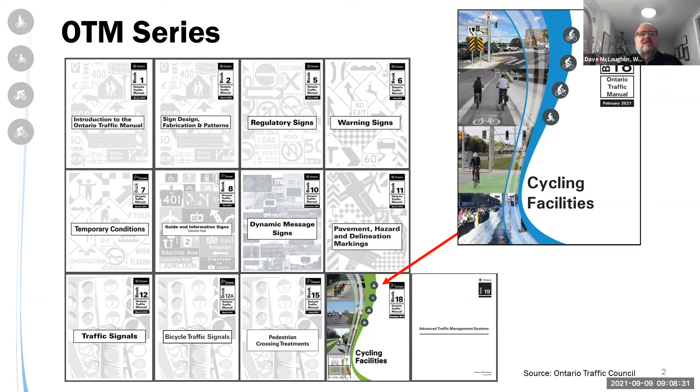So in terms of what's in it, the structure or sections are to the left. As you can see, we have a general information section. We talk about design users, we talk about the network planning process. We introduce and talk about bicycle facility design and facility selection, with some changes in terms of thresholds for facility types that we'll get into shortly. There's a greater focus on design solutions at intersections and crossings. We've added some additional components to other facility design treatments, including at transit stops. There's a section on implementation, which is sometimes the challenge, to provide guidance to municipalities on a process for implementation, support features as well, and maintenance strategies, which is a really important component. As you all know, the minimum maintenance standards for Ontario were updated a number of years ago to now include bike facilities, so that's an important consideration. Then there's a glossary, an appendix on signage, and a section on pavement markings.

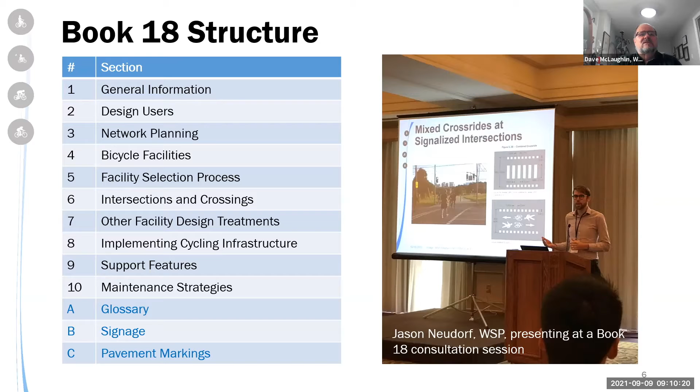So the evolution of OTM Book 18 is very similar to what you've all experienced. Early on, we were mostly focused on getting bike facilities, primarily bike lanes and multi-use pathways. That significantly moved to more dedicated and physically separated bike facilities, buffered bike lanes, protected intersections. So the new OTM Book 18 really builds upon that trend and incorporates new design guidelines to give municipalities the tools to assist them in making decisions and implementing these types of facilities.

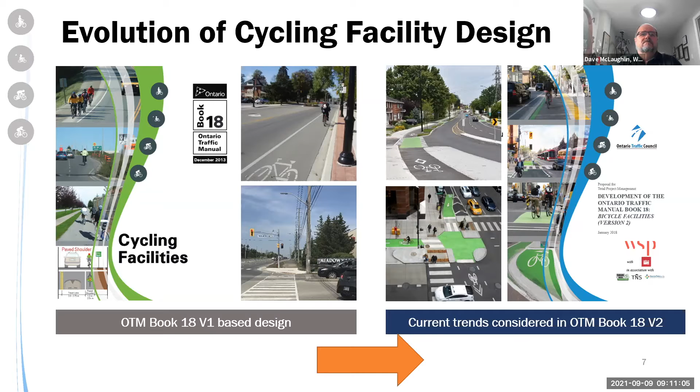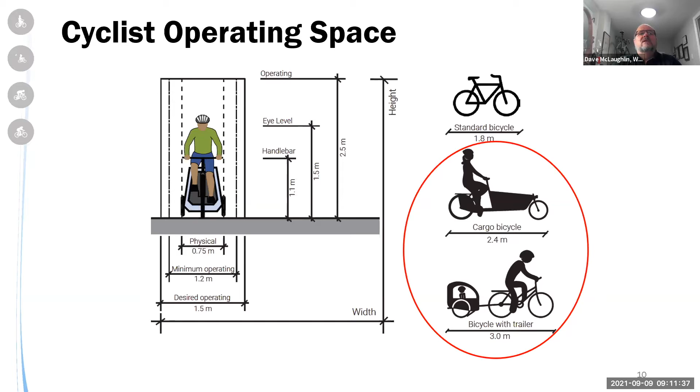So the general information section, if you can move on, really talks about design users. It talks about various details about cycling that need to be considered. Design users is all about all ages and abilities. Next. So we talk about the actual cyclist operating space. I don't think this is really that different from the original one, even though we're taking into account cargo bikes and bicycles with trailers in a little bit more focused way in these guidelines.

The design cyclist has changed a little bit. It's always a challenge when we design cycling infrastructure at a municipal level. You really want it to be ideally appealing to the majority of the population. But the reality is, people are not super comfortable with bike lanes on multi-lane roads, and you're lucky if you get out to 5 to 9% of the population. We really, in this guide, are reaching for the interested but concerned, which is basically 50 to 60% of the population who we want to encourage to cycle more.

We want to provide better facilities for them, better separation, or at least buffered facilities, and ideally much better information, guidance, and markings at intersections to guide them, and also to allow all road users to understand who will likely be where along the road system, both traveling and crossing at intersections and driveways. Next.

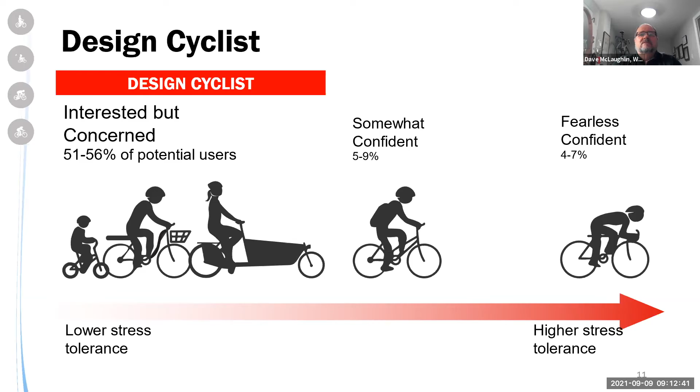So network planning, if you can go to the next slide, is really an exercise about thinking about route selection and facilities. There's a process in the OTM Book 18 to provide some guidance. We integrate complete streets for the first time in this manual. The principle that when municipalities plan to rehab or redesign their streets, that's a time to think about all users, both pedestrians, cyclists, transit, cars, and also the infrastructure below.

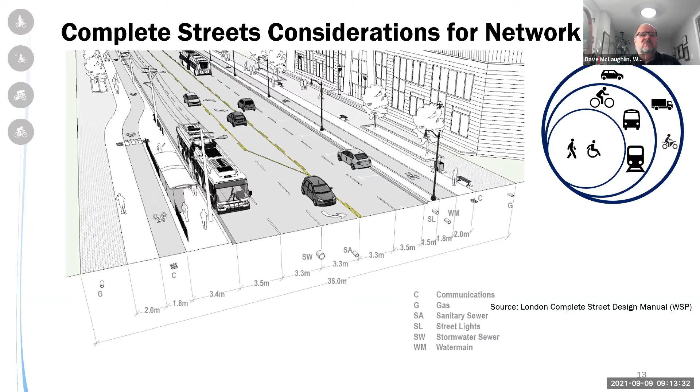So it's important to provide that integration with pedestrians and cyclists first, with transit, and then commercial vehicles after that. So that's the little icon on the top right, trying to impress upon everyone that when we design these streets, we need to design them for people first, and especially for the most vulnerable road users. Next.

So network development in OTM Book 18 provides a process that gives some guidance to municipal staff on information and inputs to help make decisions on what routes should be. It's true that we want all roads ideally to be better and improved for cycling infrastructure, and there is guidance in the book that speaks to that. When roads are improved or resurfaced, opportunities should be given to see what can be done to improve those. But on those components of a network that's been designated and approved by council, there's a process to find the best route.

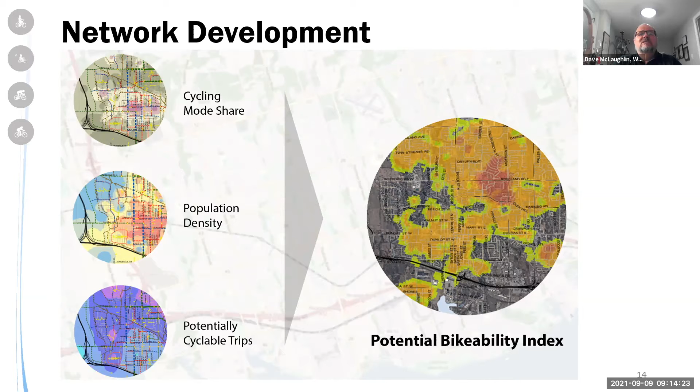So looking at cycling mode share, looking at population density, looking at areas where we think we can get more cycling trips, looking at equity, proximity to schools, and all these types of things come into place when we're doing this type of analysis in GIS. Next.

So an integrated cycling network really comes together as a number of layers. And as planners and designers and engineers, we think this way when we develop these plans. We don't just think about routes and facility types. We also think about implementation. We also think about users.

So if you look at the graphic on the left, and it may not be necessarily in the same order for you, but we talk about a recreational cycling network, which would be mostly off-road for people, a local cycling network, which would be on local roads where we don't really have designated facilities.

The speed might be posted at 40 or 30 kilometers an hour, and there's very little traffic. Then we talk about the more commuter spine networks on your collector and arterial roads that really require designated and ideally buffered or physically separated cycling infrastructure. We integrate that with road, transit and pedestrian networks so that they are all connected, which is really important.

And in the design of cycling infrastructure, we also want to be careful that we take into account how pedestrians are accommodated and how cyclists and pedestrians sort of interface at intersections, because we're, as you all know, improving our pedestrian systems to make them more accessible. We want to make sure that as we build the cycling infrastructure we don't conflict with that or add additional confusion to both pedestrians and cyclists on how they should interface at intersections and crossings.

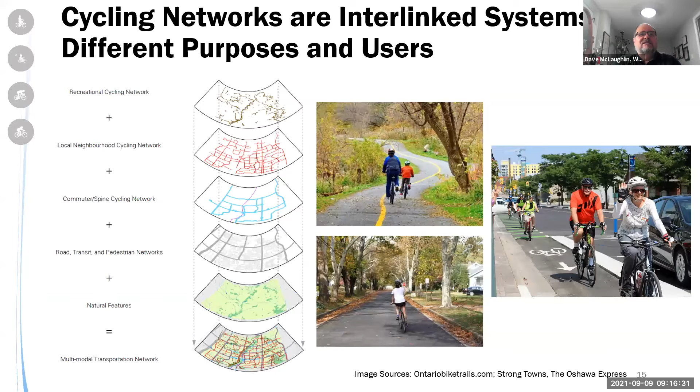I am now going to pass the baton over to my esteemed colleague, Shawn Smith, who's going to take you through some of the design changes and highlights in the new OTM Book 18. So Shawn, over to you.

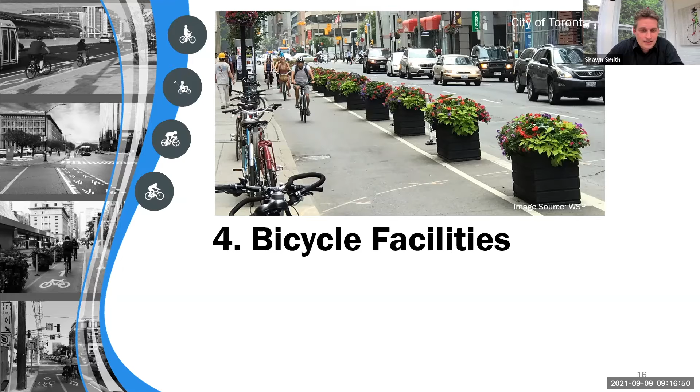Thanks, Dave. Yeah, so section 4 focuses exclusively on linear cycling facility design, and there's an increased level of guidance from the original Book 18. Here are all of the facility types that are covered, and they're separated into 3 different categories. On the left column is the physically separated bikeways, which includes physically separated cycle lanes, cycle tracks, and in-boulevard multi-use paths. And then the middle column are the bicycle lanes on street, which include the conventional, buffered, and contraflow, on one-way streets. And then the right column is the shared cycling facility type, which covers advisory bike lanes, a new type which I'll discuss in a few minutes, neighborhood bikeways, mixed traffic operation on quiet streets, and paved shoulders.

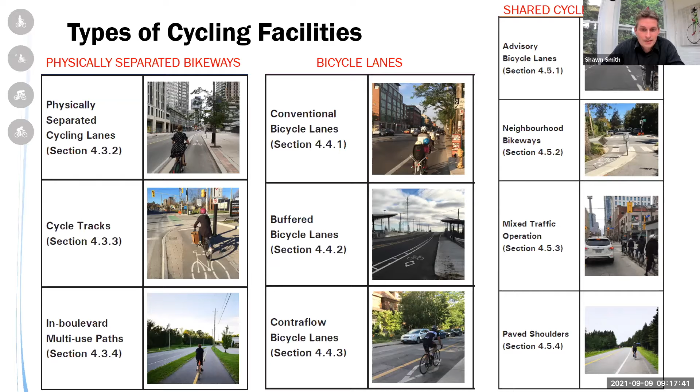So the new Book 18 also contains detailed guidance on different considerations and applications of separation techniques, such as curbs, planters, bollards. And you can see here that they vary in degree of protection, aesthetic value, and costs and other factors that need to be considered.

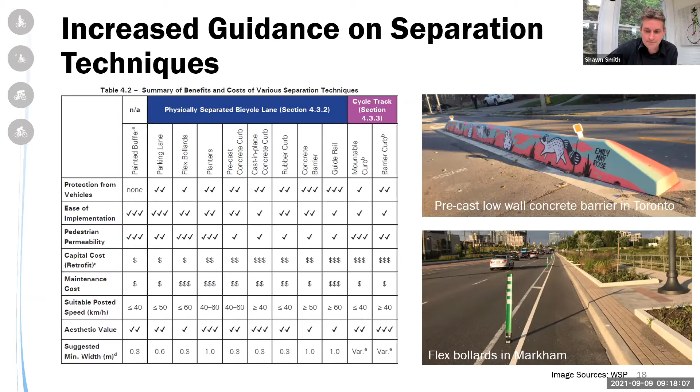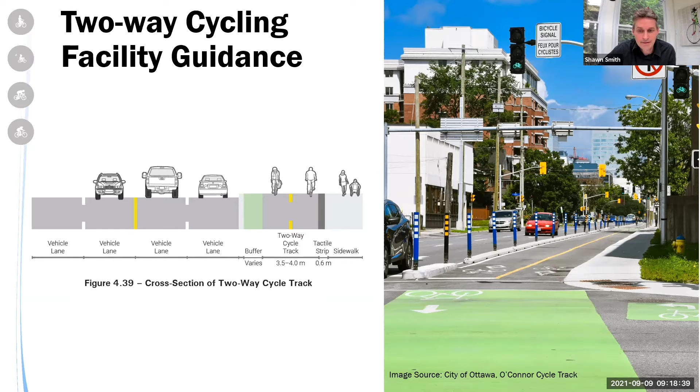There's also increased guidance on two-way cycling facilities for multi-use paths and cycle tracks. Key challenges for two-way facilities are that they are sometimes less intuitive, often have complex intersection designs, and can sometimes be difficult to accommodate cyclist queuing. But benefits, on the other hand, are reduced space requirements overall, ease of maintenance, because there's one facility instead of 2, and also a high degree of comfort.

As I mentioned, advisory bike lanes are a new facility type used when a roadway is too narrow to accommodate both two-way traffic and traditional bike lanes at the same time. The typical application context is 30 to 50 kilometers per hour and less than 4,000 vehicles per day. Motorists move into the bike lane to avoid oncoming traffic, yielding to cyclists. And they can often be implemented in the same space as 2 shared lanes, but offer a traffic calming benefit as well as significant improvement in cyclist comfort when you compare it to, say, putting sharrows on the road.

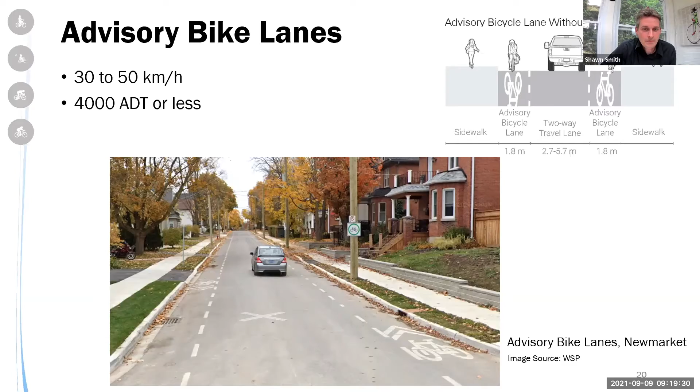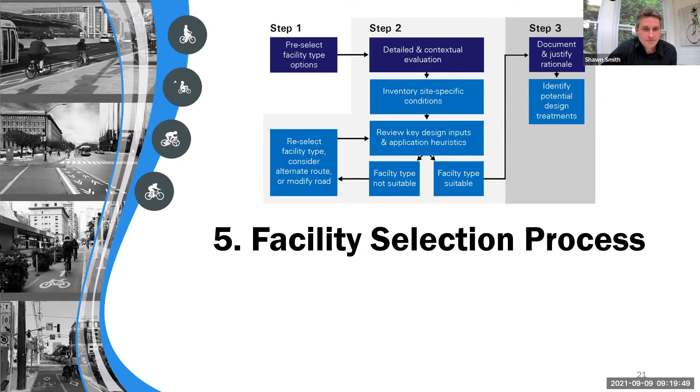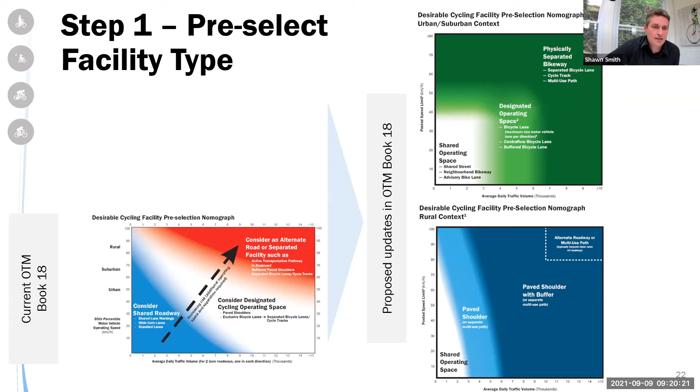Okay, on to section 5, which is all about the facility selection process. And Book 18 still has the 3-step process. However, we've updated the tools that recommend physical separation at lower motor vehicle speed and volume thresholds. So some of you may be familiar with the facility selection nomograph from the original Book 18, which is shown on the left. And on the right is the updated version, and we've split it into urban suburban on the top and the rural context on the bottom. And then following step 1, step 2 refines and confirms the facility type using the context and engineering judgment. And then step 3 of the process documents the design decision and rationale.

So I'll delve into the nomographs a little bit further. So here is the urban suburban one. And the white space in the bottom left is the shared operating space. We've got traffic volume across the bottom axis, and then the posted speed limit on the left axis. So we're recommending 40 kilometers per hour maximum for shared streets in mixed traffic.

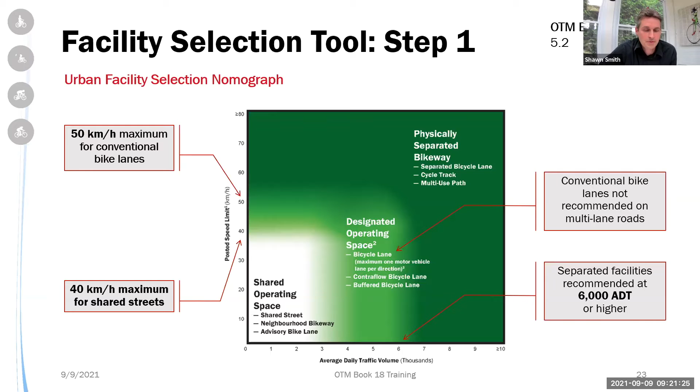And then you move into the light green space, which is the designated operating space, where we're recommending a maximum 50 kilometers per hour and up to 6,000 vehicles per day. And a big change, as Dave mentioned, is that conventional bike lanes are no longer recommended on multi-lane roads. So the minimum for, say, a 4-lane road would be a buffered bike lane, but preferably even going to a cycle track, depending on the context.

And here is the rural nomograph. So again, starting in the bottom left with the shared operating space. It's still appropriate, but on very low volume roadways and the lower speed limits. And then moving up to paved shoulders, when you get to about 1,500 to 2,000 vehicles per day and above 60 kilometers per hour as a minimum. And then at greater thresholds, 6,000 vehicles per day, recommending a buffer with the paved shoulder or a separate multi-use path beyond the clear zone of the roadway.

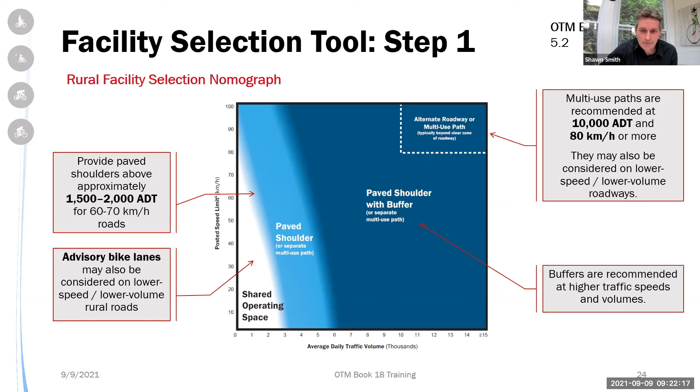So in step 2, we're refining the facility selection type. There's some new tools like these charts here, which take into account some of the traffic considerations or operating characteristics of the roadway and help you narrow down further based on the various factors. For example, the function of the roadway, the vehicle mix, pedestrian activity, frequency of intersections and crossings, on-street parking, and so on.

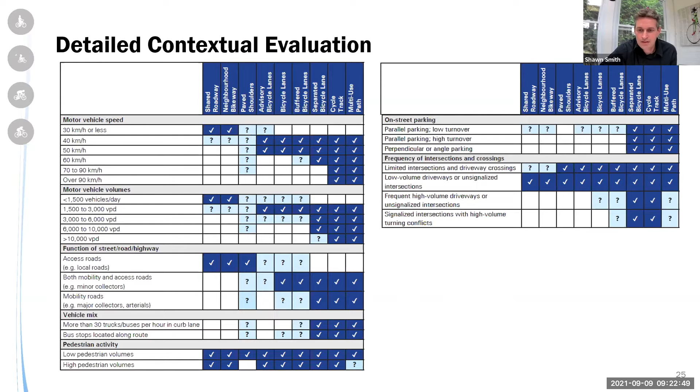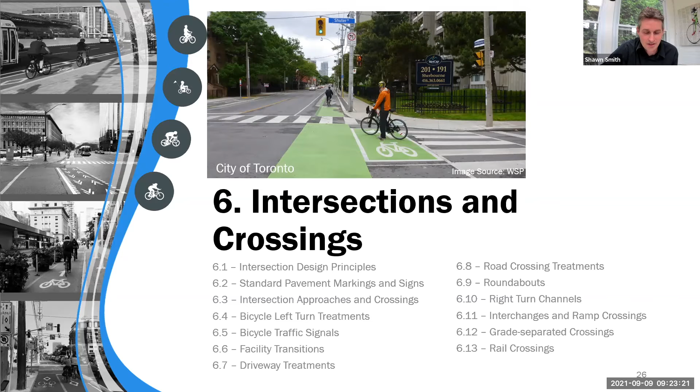Okay, so on to section 6, which is the biggest chapter in the new guide. It makes up about a third of the overall guide and covers things like adjacent and setback crossings, including protected intersections, driveway treatments, right turn channels. And there's also expanded guidance on mid-block crossings, roundabouts, grade separation, and so on. So there's lots of material. I'll just touch on some of the highlights today.

And some key features of the protected intersection are that setback crossing, as I mentioned, for the cyclist, 4 to 6 meters from the parallel street. And the corner refuge island, and an appropriate sized radius for that island that helps slow turning vehicles. And the forward bicycle queuing, so you could see that they get a head start from the motor vehicles when they get a green signal.

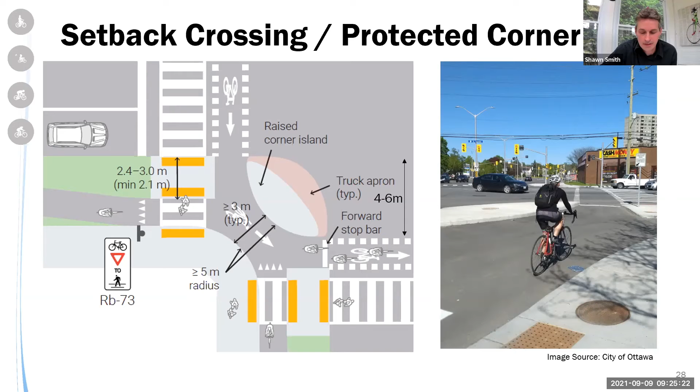And here's an example of an adjacent crossing, which typically requires less space than setback crossings. That's one of the advantages. It's adjacent to the motor vehicle lane. In this case, the figure, it drops down to road level, and the physical separation is maintained to the stop line. And there is a forward stop bar to improve visibility. Another consideration could be using signal phasing strategies like a leading bicycle interval, which would give the cyclist a head start green before the motorist.

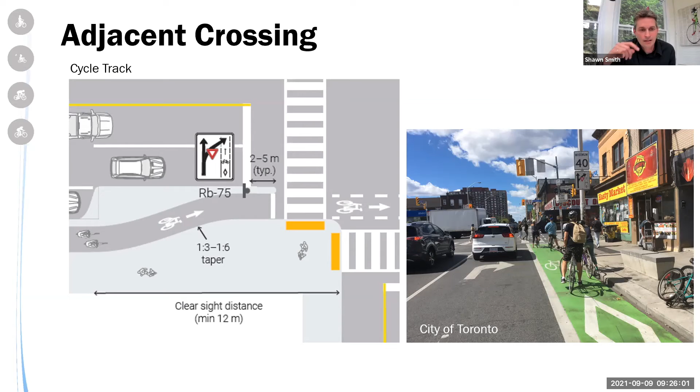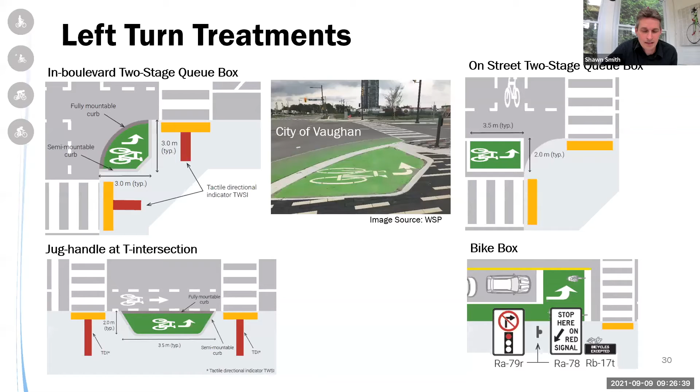Okay, well, in addition to the protected corners, here are 4 design solutions for cyclists to make a left turn. So we've got the 2-stage queue boxes, both in boulevard, which is the top left example and the one in the photo, and the on-street 2-stage queue box in the top right. And then there's also a jug handle or pocket design used at T intersections, and the bike box, where cyclists can go ahead of the motor vehicle lane at a red signal.

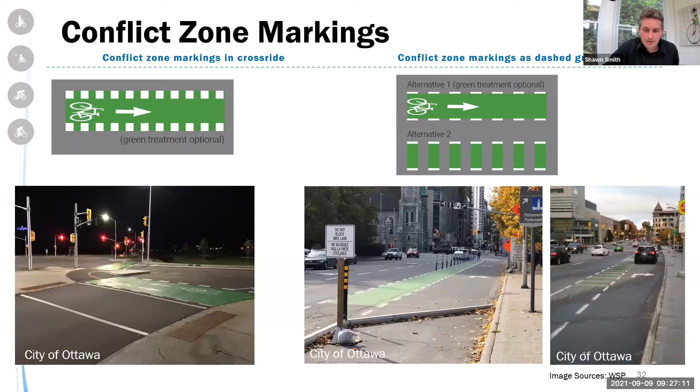There's more clarity in the new guide on conflict zone markings and the use of elephant's feet and dashed markings, with elephant's feet on the left and dashed markings on the right for on-street facilities. There's also flexibility in the use of dashed green or solid green and how the green is applied, so it's up to a municipality how they want to set their standard for the green surface treatment.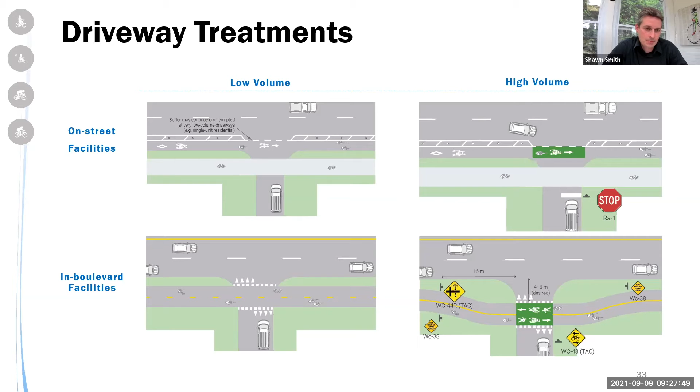The distinction is really between risk exposure, between low volume and high volume. Uncontrolled crossings where people ride bikes should be faced with either a stop sign or a yield sign. There are different treatments that can be done here.

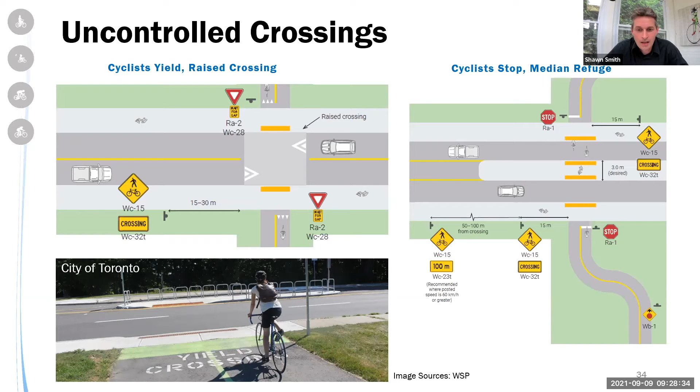A center median refuge can help improve the safety and comfort of the crossing, shown in the example on the right and in the photo. Another alternative is to consider a raised crossing at the conflict point to encourage slower operating speeds of motorists. Another consideration is to use an S-curve at the approach, which helps slow cyclists as they get to the crossing.

Roundabouts are also covered in the new guide, with some great, very progressive information. The recommendation is a radial roundabout design, which slows motorists at the entries and exits of the roundabout, compared with a tangential design, which encourages higher speeds.

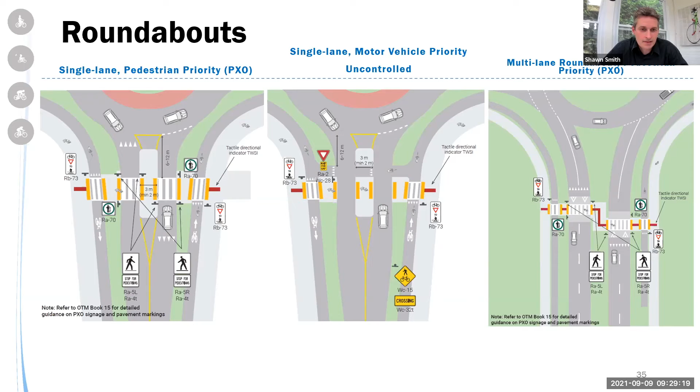Design solutions shown here are for single lane roundabouts, the two on the left, and a multi-lane roundabout on the right with a PXO crossing, whereas the one in the middle is a motor vehicle priority design, where pedestrians and cyclists wait for a gap.

Traditional turn channels often feature a generous radius that allows turning motor vehicles to operate at relatively high speeds. Newer smart channels provide an improvement, reducing speeds and providing cyclist and pedestrian priority at the crossings. Here's an example of one that was recently built in Sudbury.

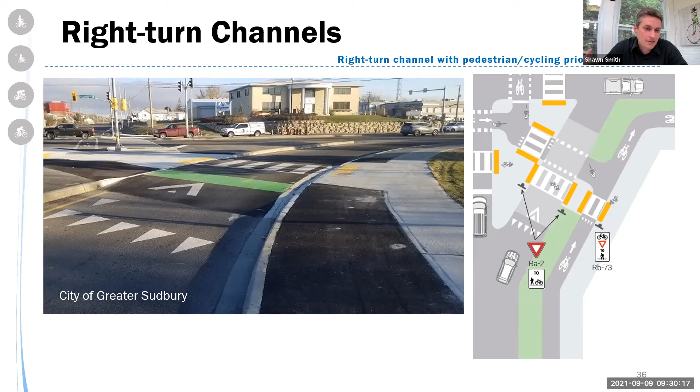We've also introduced a new marking for raised crossings, the triangle inside the triangle you can see in the photo, which is more common in the US, rather than the one used in the past in Ontario where the triangle is turned the opposite way from the shark's teeth markings. This can be confusing to the average road user because the yield markings and the raised crossing markings mean different things, but they can be confused.

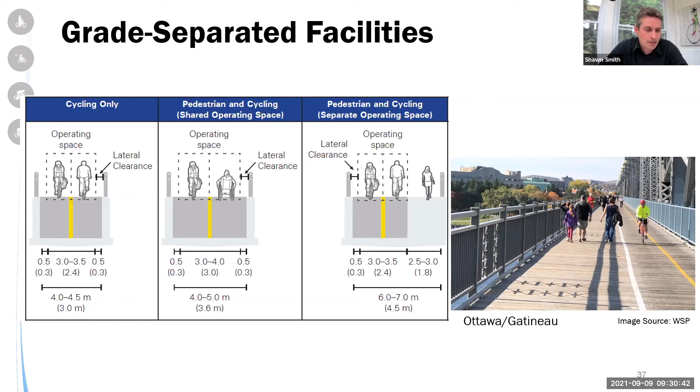Active transportation bridges and tunnels may be implemented to provide connections across major barriers, bodies of water, highways, and rail corridors. The figure here shows the various pedestrian and cycling configurations, as well as the minimum and desired widths of these.

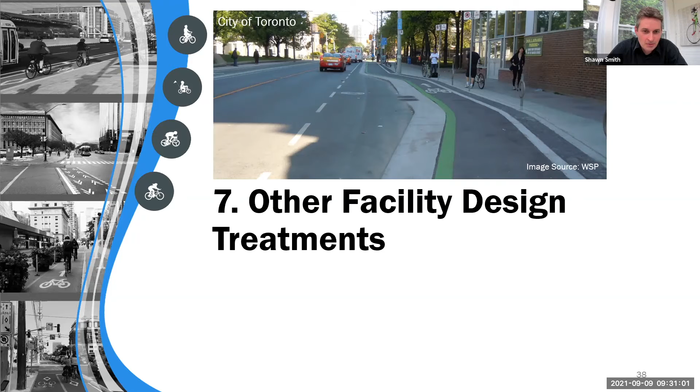Okay, so that's a quick overview - I know a lot of information on the crossings. Now I'll move on to section 7, which covers other facility design treatments, like curbside management, shown in the photo there of a parking lay-by.

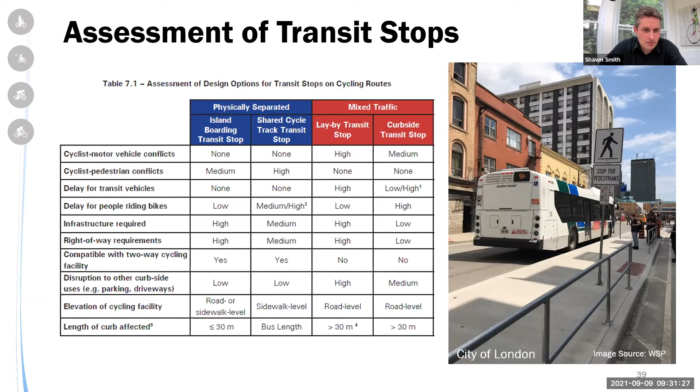There's some great information and new guidance on bus stop design and assessment of design options for various configurations. There are four types of bus stops identified in the new guide: two physically separated and two with on-street configurations. I won't get into the details, but here are the four options.

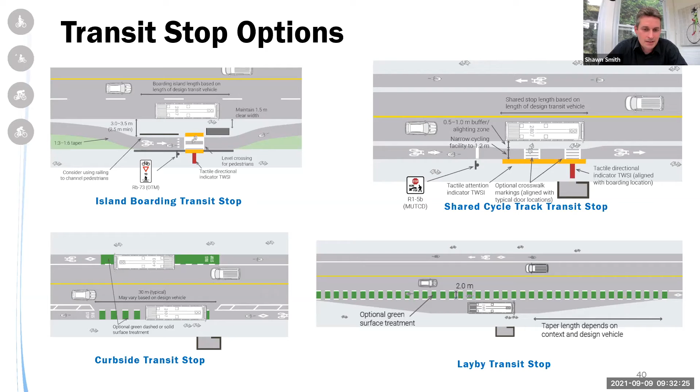There's a lot more guidance on accessibility-informed design, like tactile walking surface indicators at crossings, and delineation for separating cyclist and pedestrian facilities, shown here. This is still a very evolving practice in Ontario, but I feel the new book is very progressive in the recommendations it includes.

You can see different types of separation between pedestrians and cyclists here, with the beveled curb, tactile surface, or planting zone.

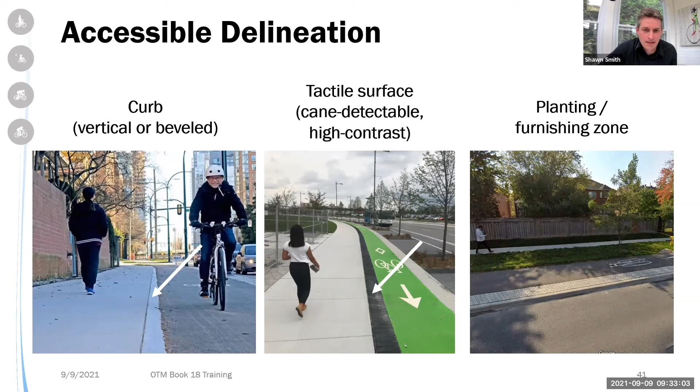Section 8 is all about implementation, and still has the 5-phase process from the previous guide, but with definitely expanded guidance. We've also included different types of cycling projects along with case studies, from pilot projects to retrofits to complete street transformations.

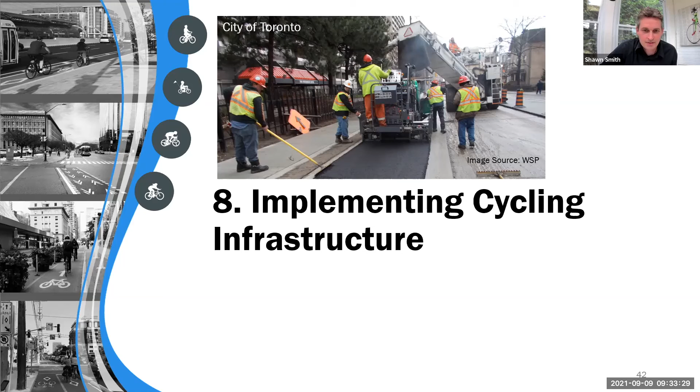So here are the steps. It covers from strategic planning to feasibility assessment and functional design, then on to preliminary and detailed design, construction, and post-completion phases, and all the steps in between.

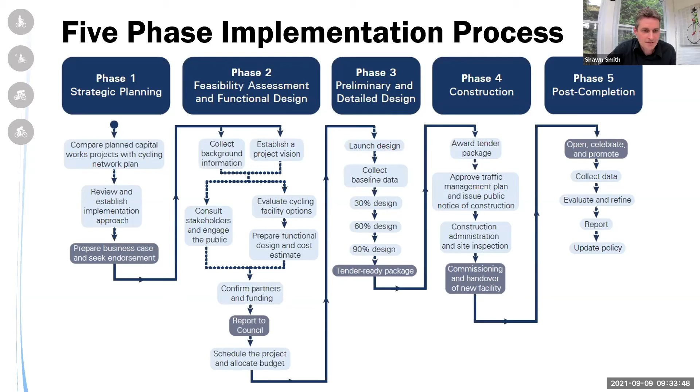So here's an example of a project, what we call a road diet or lane reconfiguration, where you're reallocating available space based on pavement markings and signage, and in this case, some bollards to provide protection. A good example of this is going from a 4-lane cross section to 3 lanes plus bike lanes, with a center left turn lane. Using the same space available, it improves the roadway for all users and safety as well.

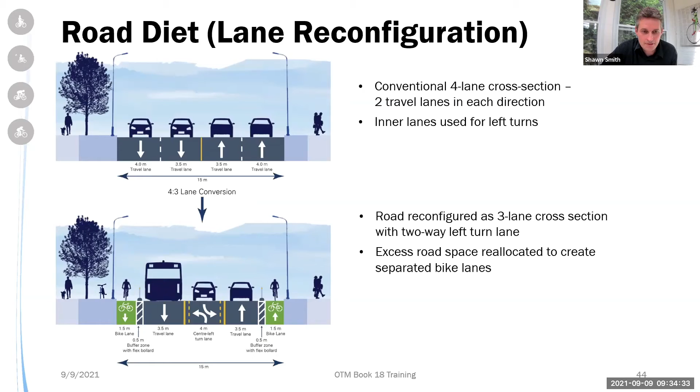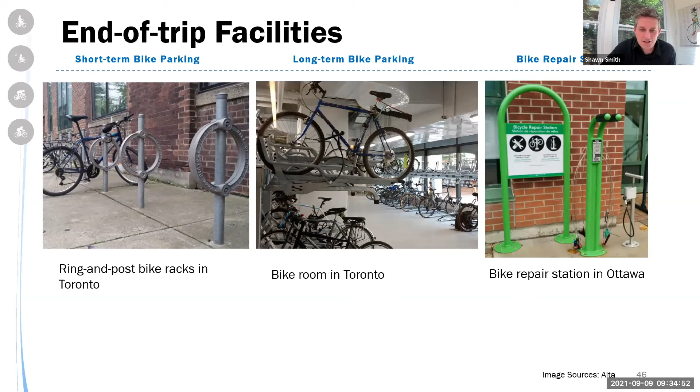Section 9 is all about support features: end of trip facilities, cycling wayfinding. We've got bike parking here, various options for short-term and long-term bike storage, and also amenities like bike repair stations and change facilities and so on.

Cycling wayfinding is detailed as well. It consists of signs, pavement markings, or tools to orient cyclists and guide them to their destinations along the network. Successful wayfinding can increase the use of bike facilities and improve the cycling experience, so it shouldn't be forgotten.

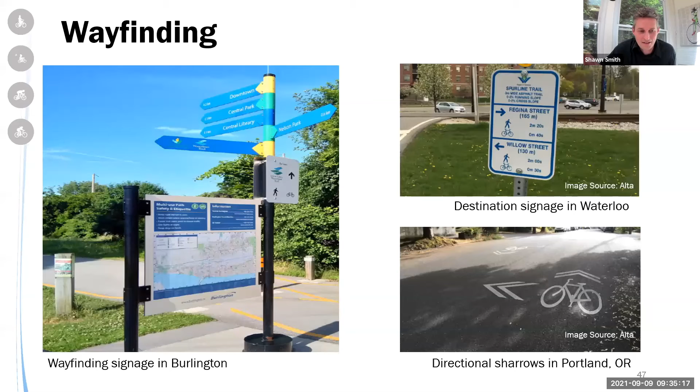Finally, Section 10 includes new content on maintenance strategies: the minimum maintenance standards for Ontario, asset management, winter cycling networks, and also more guidance on winter and non-winter maintenance activities.